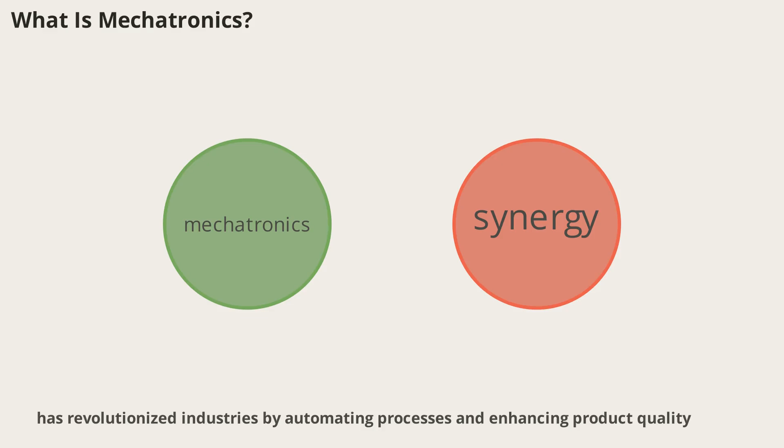Mechatronics is a fascinating field that blends mechanics, electronics, computer technology, and control engineering to create smarter, more efficient systems. Originating in Japan during the late 1960s, the term was first coined by Mr. Tetsuro Mori, a senior engineer at Yaskawa. The essence of mechatronics lies in its synergy, combining multiple disciplines to produce systems that are simpler, more reliable, and cost-effective. This introduction sets the stage for understanding how mechatronics has revolutionized industries by automating processes and enhancing product quality. As we move forward, we'll explore the key advantages and challenges associated with mechatronics.

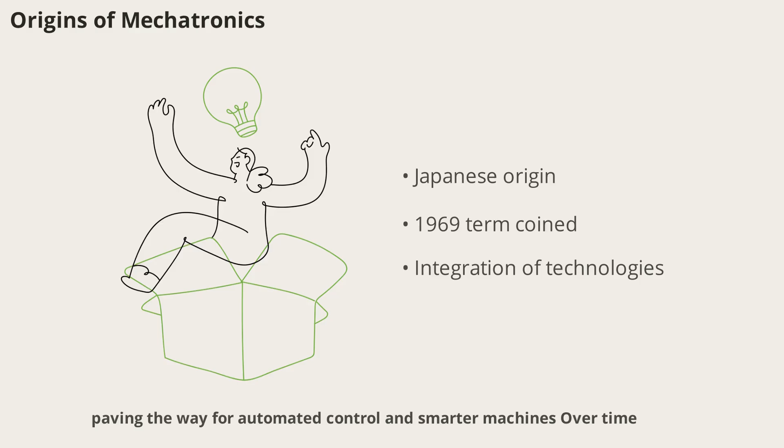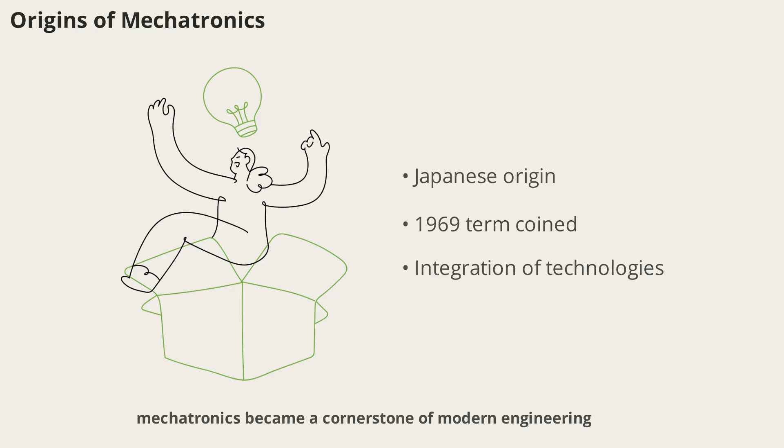The concept of mechatronics emerged in Japan in the late 1960s, with Mr. Tetsuro Mori of Yaskawa introducing the term. Initially, it described the integration of electronics and computer technology into mechanical systems, paving the way for automated control and smarter machines. Over time, mechatronics evolved to encompass a broader range of technologies, including sensors, actuators, and advanced control units. This historical perspective helps us appreciate how mechatronics became a cornerstone of modern engineering, influencing everything from manufacturing to robotics.

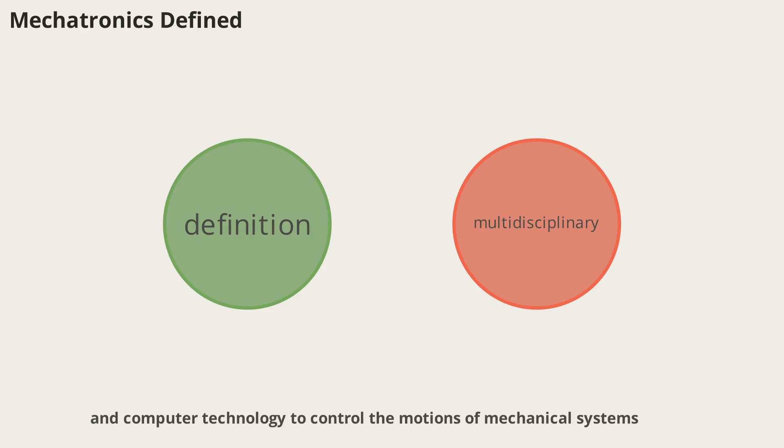Mechatronics can be defined as the application of electronics and computer technology to control the motions of mechanical systems. It represents a synergistic combination of mechanics, electrical engineering, electronics, computer science, and control systems. By merging these fields, mechatronics enables the creation of systems that are not only efficient but also adaptable and reliable. This multidisciplinary approach is what sets mechatronics apart from traditional engineering, allowing for innovative solutions in automation and intelligent design.

Mechatronics offers several compelling advantages. Automated machines can operate continuously, maximizing utilization and productivity. The reduction in human labor and fewer machine parts lead to lower operating and maintenance costs. Compact designs save space, and the use of automatic systems ensures uniform product quality. Flexibility is another key benefit, as mechatronics systems can be easily modified or redesigned. Additionally, smart machines with self-correcting sensory and feedback systems help minimize waste and improve efficiency. These advantages make mechatronics a preferred choice in many industries.

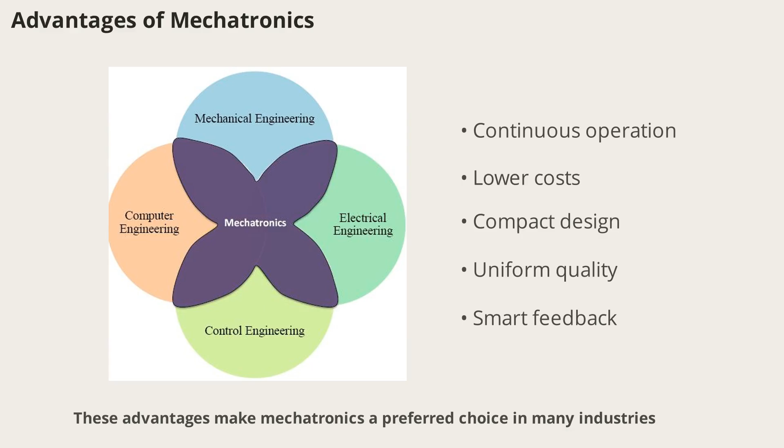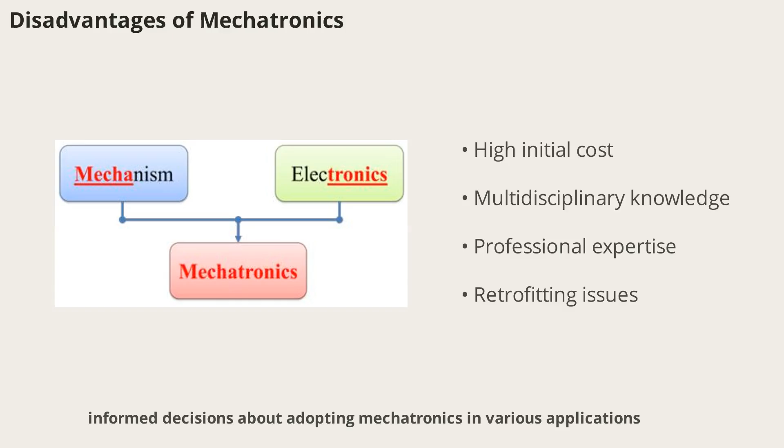Despite its many benefits, mechatronics also presents some challenges. The initial cost of implementing a mechatronic system can be high, requiring significant investment. Designers and engineers must possess knowledge across multiple fields, making the process complex. Specific problems often require highly qualified professionals to address them. Furthermore, retrofitting existing systems with mechatronics technology can be expensive and difficult. Understanding these disadvantages is crucial for making informed decisions about adopting mechatronics in various applications.

Traditional systems rely heavily on mechanical components such as levers, gears, and cams to perform tasks. In contrast, mechatronic systems integrate electronics with mechanical parts, resulting in greater flexibility and accuracy. Traditional mechanisms are often more complicated and involve more moving parts, while mechatronics simplifies design and reduces the number of components. Automation replaces manual control, making mechatronic systems more efficient and reliable. This comparison highlights the transformative impact of mechatronics on engineering and everyday devices.

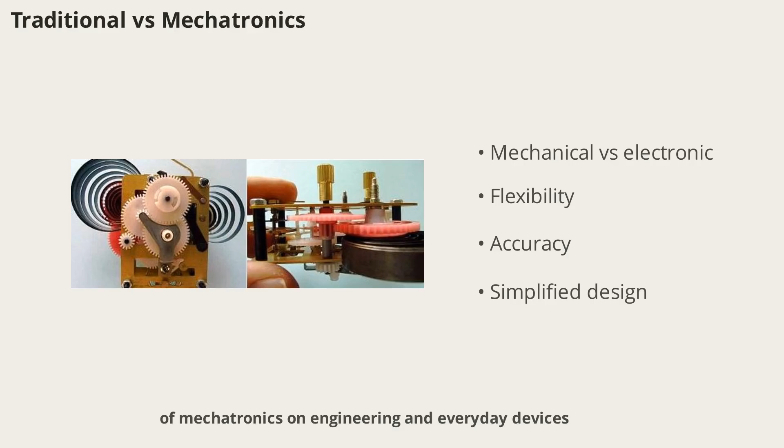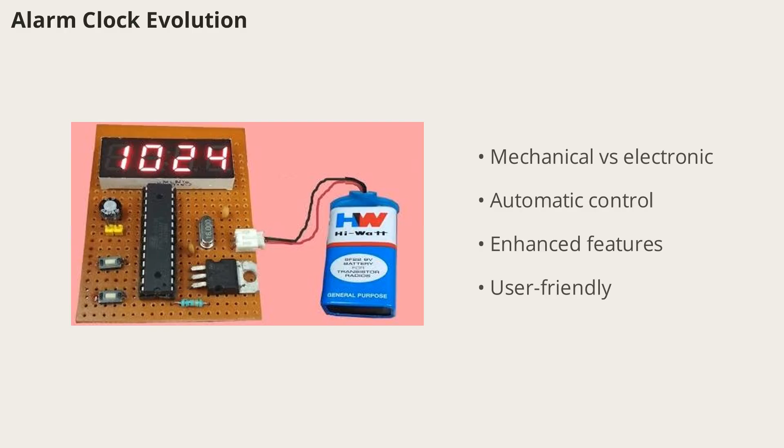A clear example of the shift from traditional to mechatronic systems is seen in alarm clocks. Traditional mechanical alarm clocks use gears and springs, requiring manual setup and adjustment. Mechatronic alarm clocks, on the other hand, combine electronics and computer technology, enabling automatic control and enhanced features. This evolution demonstrates how mechatronics improves everyday objects, making them more user-friendly, accurate, and reliable. The integration of sensors and microcontrollers allows for smarter operation and customization.

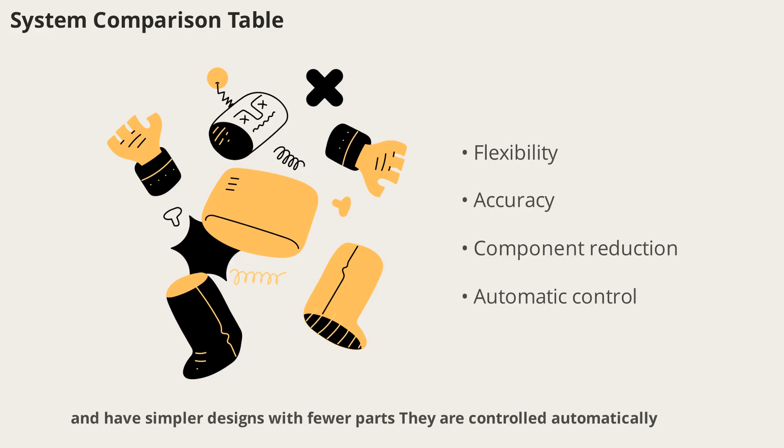Comparing traditional and mechatronic systems, several differences stand out. Traditional systems are less flexible, less accurate, and involve more complicated mechanisms with numerous moving parts. They are controlled manually and require more components. Mechatronic systems, in contrast, are more flexible, accurate, and have simpler designs with fewer parts. They are controlled automatically, making them easier to maintain and operate. This comparison underscores the advantages of adopting mechatronics in modern engineering.

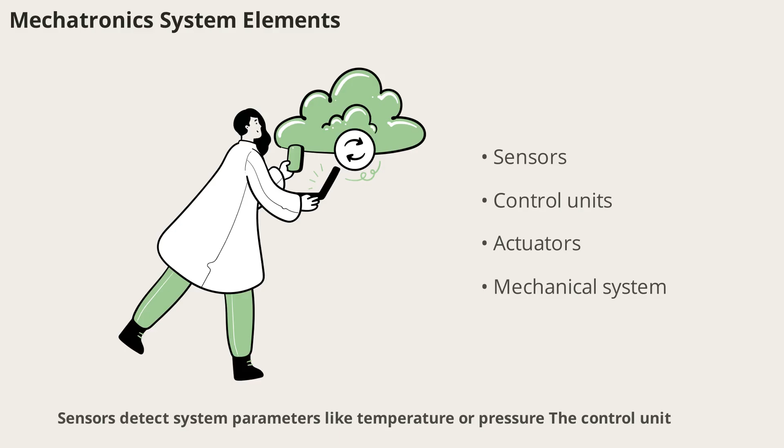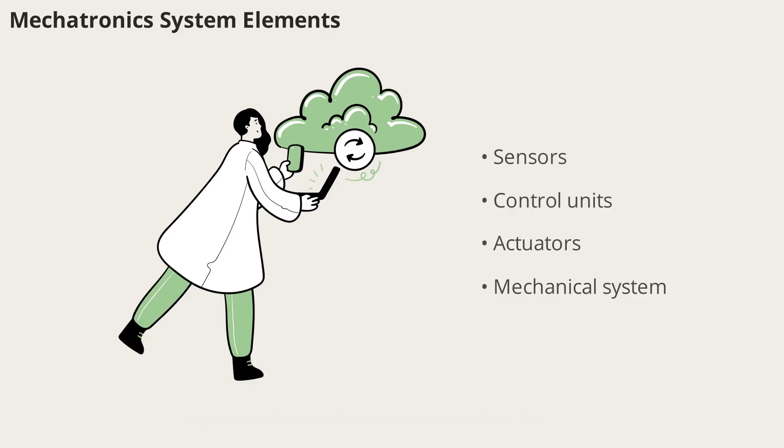A mechatronic system is composed of four main elements: sensors, control units, actuators, and mechanical components. Sensors detect system parameters like temperature or pressure. The control unit, often a microcontroller or computer, processes sensor input and makes decisions based on programmed instructions. Actuators produce motion or actions such as motors or valves. The mechanical system ties everything together, forming a complete unit like a robot or washing machine. Understanding these elements is key to grasping how mechatronic systems function.

Sensors are vital components in mechatronic systems, responsible for detecting physical parameters such as temperature, pressure, displacement, and force. Examples include thermocouples, accelerometers, and gravity sensors. These devices convert physical inputs into electrical signals, which are then processed by the control unit.

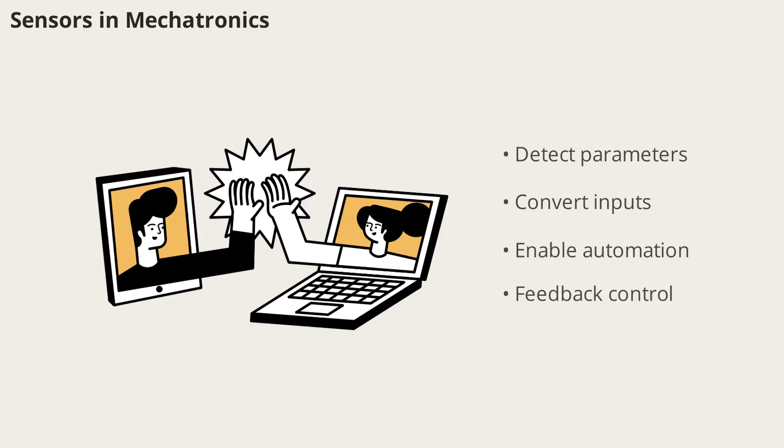Sensors enable systems to monitor their environment and respond intelligently, forming the foundation for automation and feedback control. Their role is essential in ensuring accuracy and reliability in mechatronic applications.

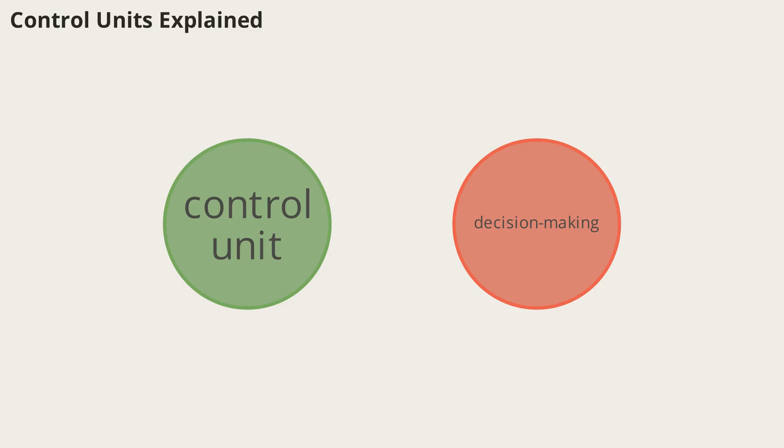The control unit in a mechatronic system acts as the brain, making decisions based on sensor input and programmed instructions. It can be a microcontroller, computer, electronic circuit, or PLC. By processing data from sensors, the control unit determines the appropriate actions for actuators. This decision-making capability allows for precise control and automation, adapting to changing conditions and ensuring optimal performance. The control unit is central to the intelligence of mechatronic systems.

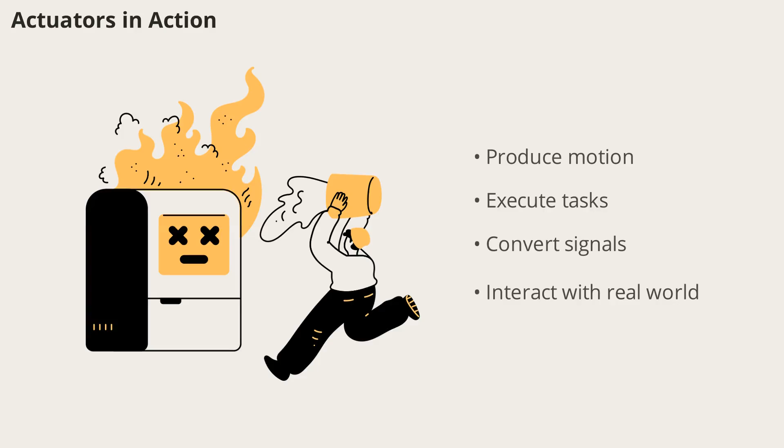Actuators are the components that produce motion or cause actions in a mechatronic system. Examples include solenoids, DC motors, stepper motors, servo motors, hydraulic and pneumatic cylinders, and heaters. Actuators receive signals from the control unit and execute tasks such as moving parts, opening valves, or heating elements. Their ability to convert electrical signals into physical actions is what enables mechatronic systems to interact with the real world

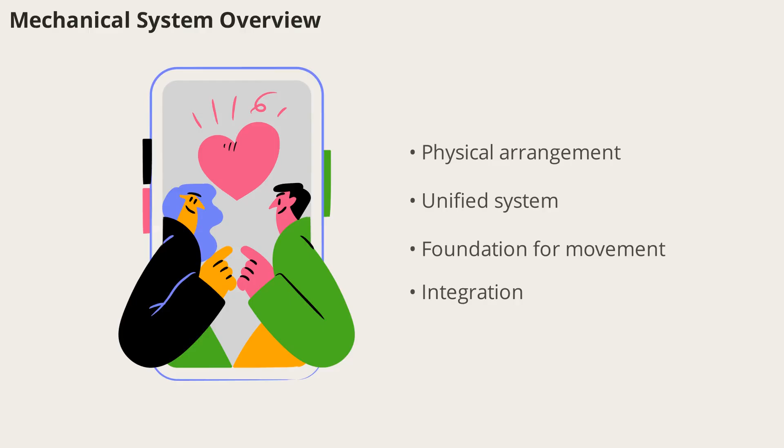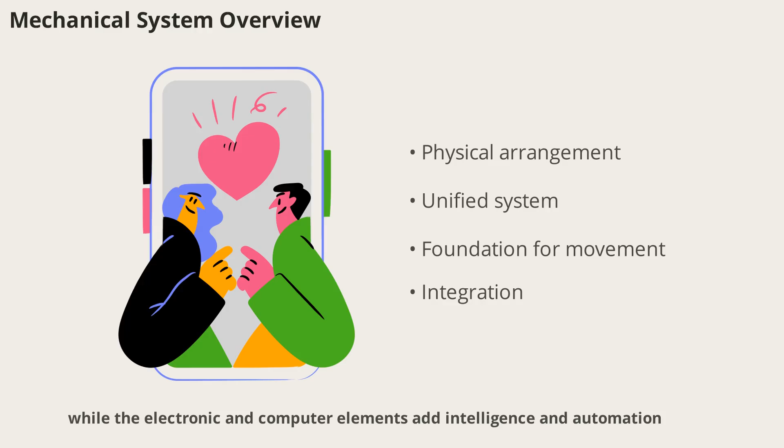and perform complex operations. The mechanical system is the physical arrangement of components that forms the core of a mechatronic device. Examples include robots, autonomous guided vehicles, vehicle engines, and washing machines. These systems are designed to work as a unified whole, with sensors, control units, and actuators integrated seamlessly. The mechanical structure provides the foundation for movement and operation, while the electronic and computer elements add intelligence and automation.

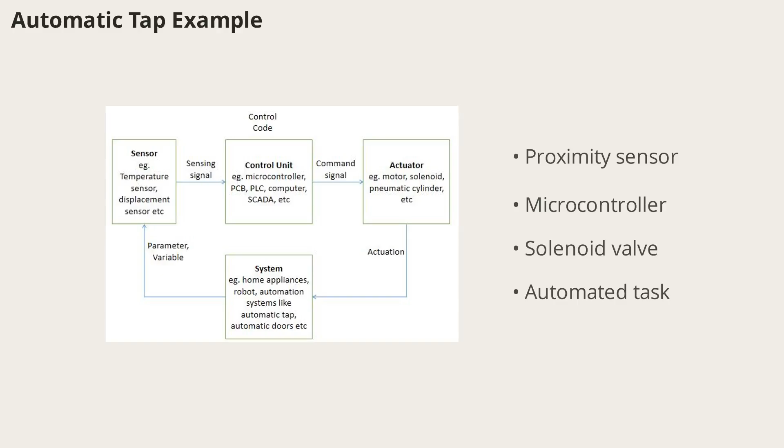A practical example of a mechatronic system is the automatic tap. Here, a proximity sensor detects the presence of a hand and sends a signal to the control unit, typically a microcontroller. The microcontroller processes the input and decides whether to activate the tap. A solenoid valve acts as the actuator, controlling the flow of water. This system demonstrates how sensors, control units, and actuators work together to automate everyday tasks, improving convenience and hygiene.

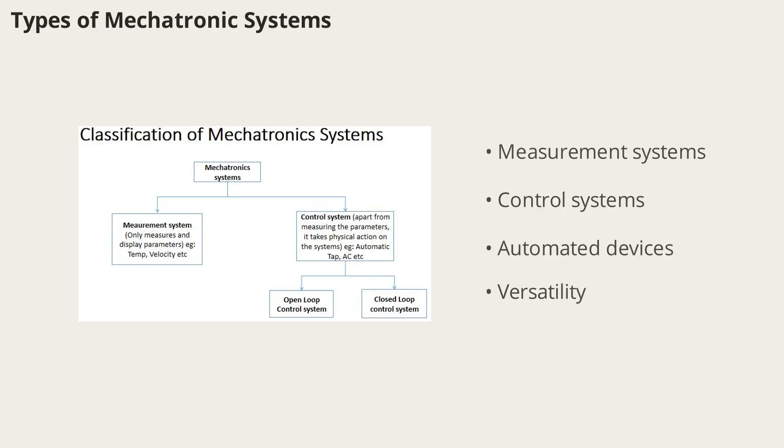Mechatronic systems come in various forms, each tailored to specific applications. Examples include measurement systems, control systems, and automated devices. Measurement systems use sensors to monitor physical parameters, while control systems manage variables and sequences of events. Automated devices combine these elements to perform tasks with minimal human intervention. Understanding the different types of mechatronic systems helps us appreciate their versatility and impact across industries.

Measurement systems in mechatronics use sensors to convert physical inputs, such as temperature or displacement, into electrical outputs like voltage. The data processing unit receives this input and processes it according to programmed instructions, often performing signal conditioning. The data presentation unit or recorder then displays or records the measured parameter in the desired format. An example is the digital thermometer, which we'll explore in detail later.

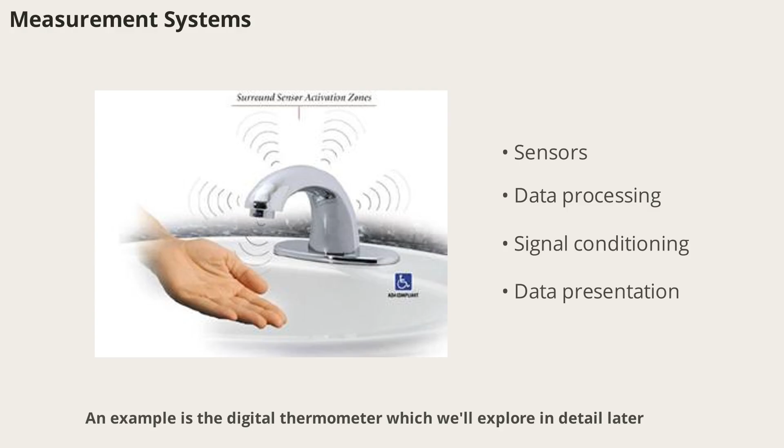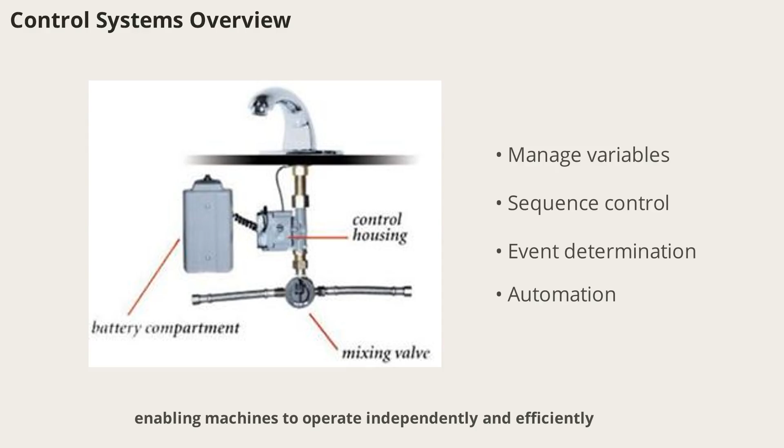Control systems are designed to manage variables, sequences of events, or determine whether an event occurs. Examples include steering control in automobiles, room air conditioning, automatic sensing doors, and washing machines. These systems use sensors and control units to monitor conditions and make decisions, ensuring optimal performance and safety. Control systems are fundamental to automation, enabling machines to operate independently and efficiently.

Open-loop control systems operate without feedback, meaning the control action is based solely on the reference input. The controller does not check the output condition, so errors cannot be self-corrected. These systems are simple in construction, economical, and easy to maintain, but they are less accurate and reliable. Any changes in system components must be addressed manually.

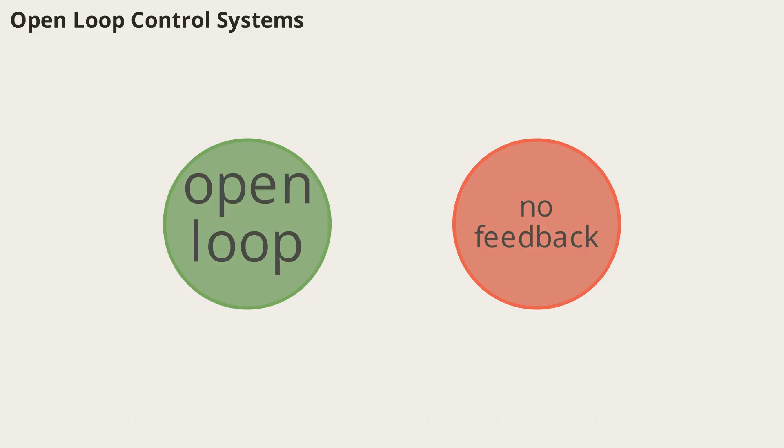An example is the manual cloth dryer, where the operator sets the timer without checking if the clothes are dry. Consider a cloth dryer as an open-loop system: the operator manually sets the timer based on the wetness of the clothes. After the set time, the dryer stops regardless of whether the clothes are actually dry. There is no feedback mechanism to check the dryness, making the system dependent on human judgment. This example illustrates the limitations of open-loop systems, highlighting the need for more accurate and automated solutions.

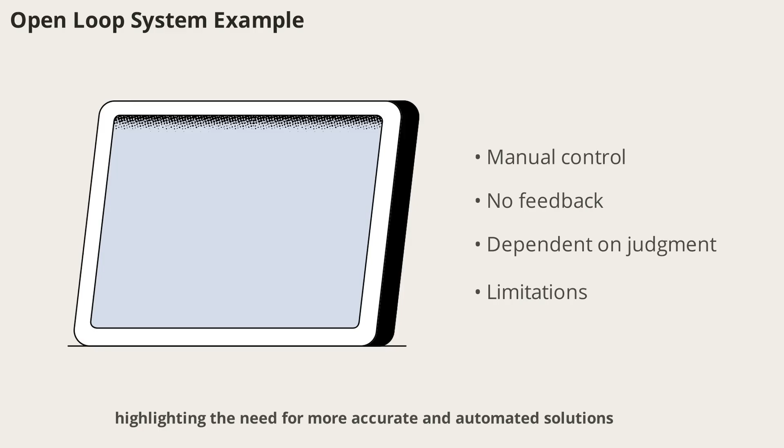Closed-loop control systems use feedback to monitor output and adjust control actions accordingly. The controller considers both the reference input and feedback from sensors, enabling automatic correction of errors. These systems are highly accurate and can be automated, but they are more expensive and complex to design and maintain. Closed-loop systems are essential for applications requiring precision and reliability, such as automated cloth dryers that sense dryness and adjust

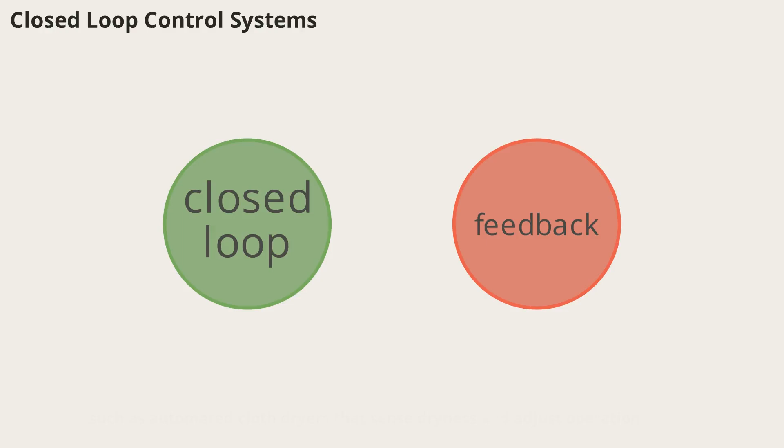operation. In a closed-loop cloth dryer, the user specifies the desired dryness level. A sensor measures the dryness of the clothes and provides feedback to the controller. The controller compares the sensor output with the required dryness and adjusts the operation accordingly.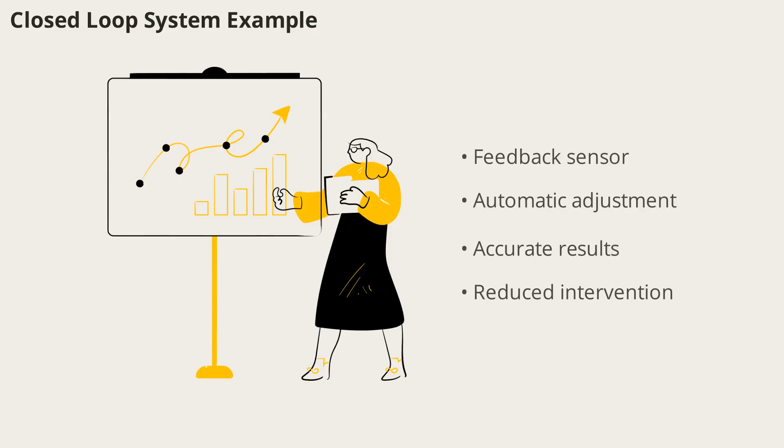This feedback mechanism ensures accurate results and reduces the need for manual intervention. Closed-loop systems demonstrate the power of automation and intelligent control in mechatronics.

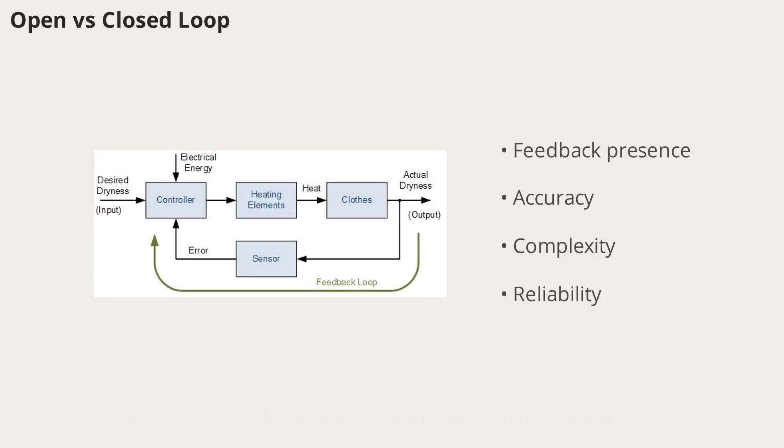Comparing open and closed-loop systems reveals key differences. Open-loop systems lack feedback, are less accurate, and rely on human judgment. They are easier to design and build but cannot automatically correct errors. Closed-loop systems include feedback elements, are more accurate, and adjust control actions based on output and sensor input. They are more complex but offer greater reliability and automation. This comparison highlights the importance of feedback in modern mechatronic systems.

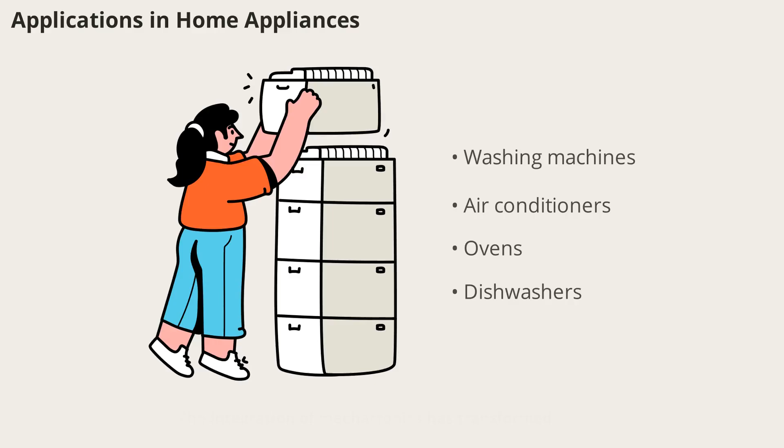Mechatronics is widely used in home appliances such as washing machines, air conditioners, ovens, and dishwashers. These devices incorporate sensors, control units, and actuators to automate processes, improve efficiency, and ensure consistent quality. Automation in home appliances reduces manual effort and enhances user convenience, making everyday tasks simpler and more reliable. The integration of mechatronics has transformed the way we interact with household devices.

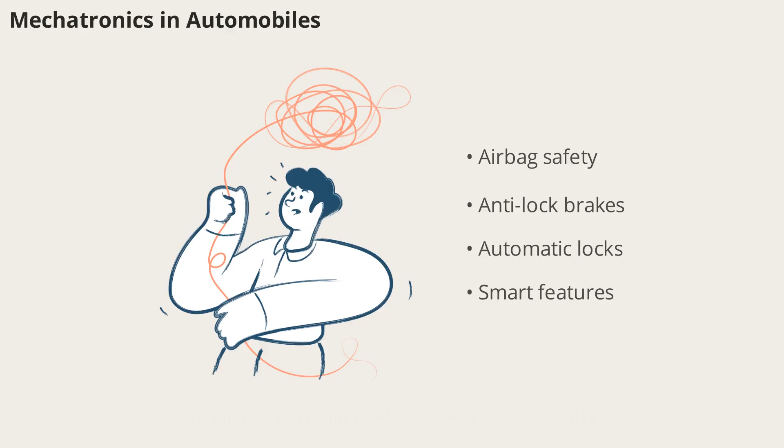Automobiles benefit greatly from mechatronics, with systems like airbag safety, anti-lock brakes, and automatic door locks. Sensors and control units monitor conditions and respond instantly to ensure safety and performance. Mechatronics enables advanced features such as adaptive cruise control and automated parking, making vehicles smarter and safer. The integration of electronics and mechanics in automobiles showcases the versatility and impact of mechatronics technology.

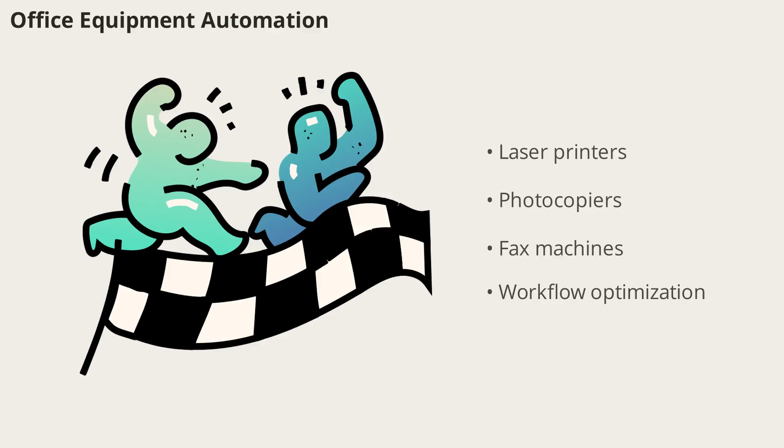Mechatronics is also prevalent in office equipment such as laser printers, photocopying machines, and fax machines. These devices use sensors and control units to automate tasks, improve speed, and enhance reliability. Automation in office equipment streamlines workflow, reduces errors, and increases productivity. The adoption of mechatronics in office environments demonstrates its ability to optimize routine operations and support modern business needs.

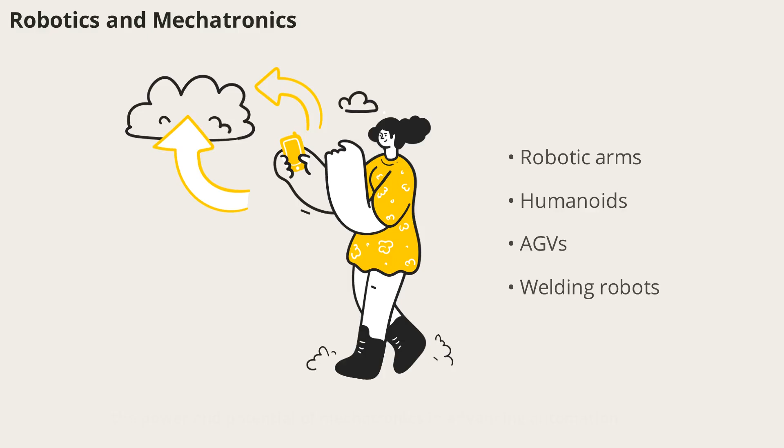Robotics is a prime example of mechatronics in action. Robotic arms, humanoids, automated guided vehicles, and welding robots all rely on sensors, control units, and actuators to perform complex tasks. Mechatronics enables robots to operate autonomously, adapt to changing environments, and execute precise movements. The integration of multiple technologies in robotics demonstrates the power and potential of mechatronics in advancing automation.

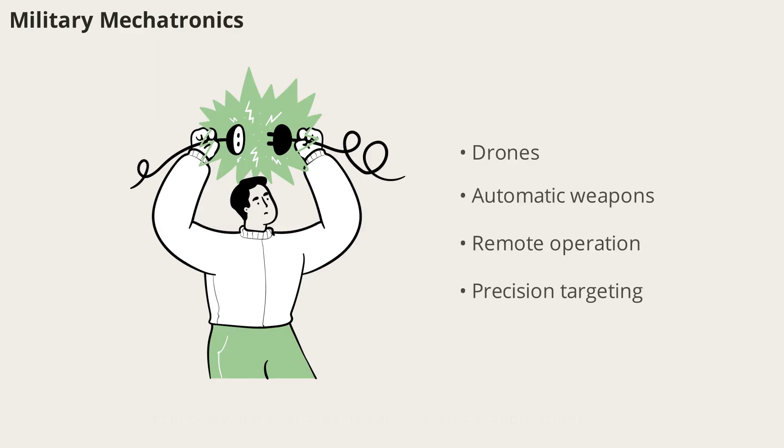Mechatronics plays a crucial role in military operations, powering drones and automatic weapon systems. Sensors and control units enable real-time monitoring and response, enhancing safety and effectiveness. Automation in military devices allows for remote operation and precision targeting, reducing risks and improving mission outcomes. The integration of mechatronics in defense technology demonstrates its value in critical applications.

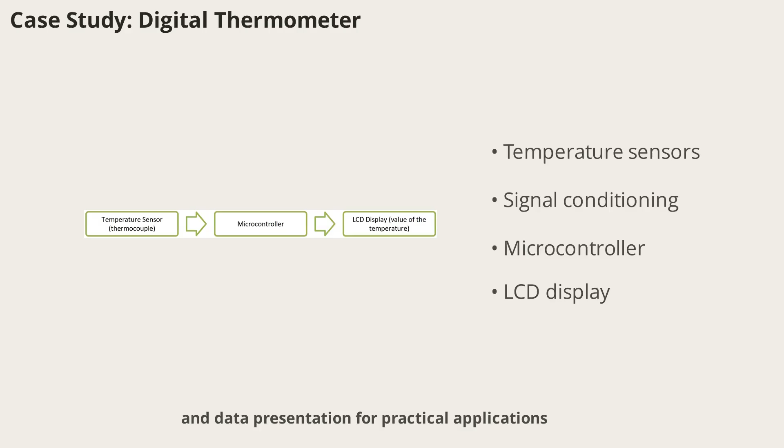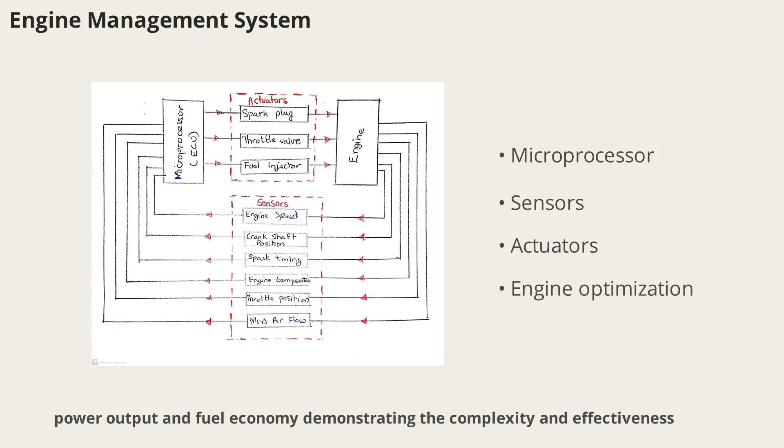In an engine management system, a microprocessor receives input from various sensors and operates actuators to optimize engine performance. Sensors monitor engine speed, crankshaft position, spark timing, temperature, throttle position, and airflow. The microprocessor processes this data and controls actuators like spark plugs, throttle valves, and fuel injectors. This system ensures efficient combustion, power output, and fuel economy, demonstrating the complexity and effectiveness of mechatronics in automotive engineering.

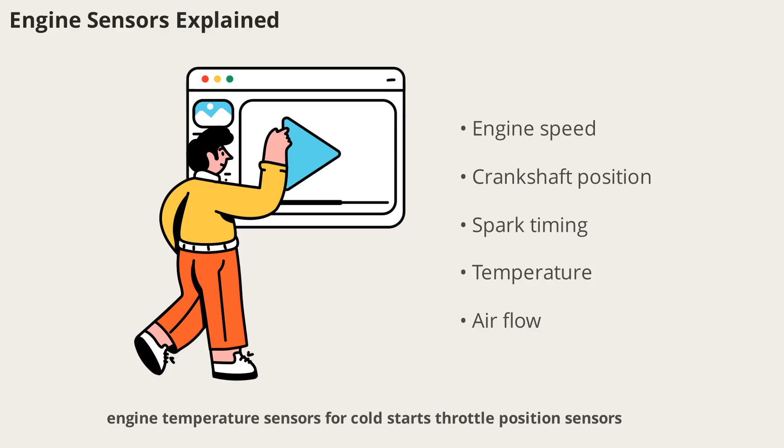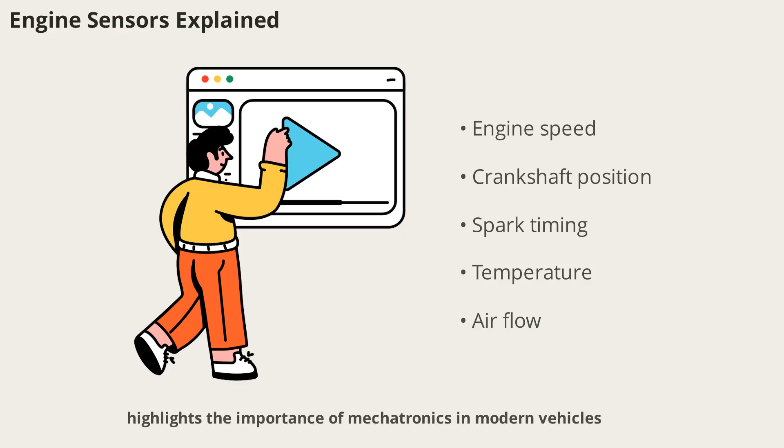Engine management systems rely on several sensors: engine speed sensors for spark timing, crankshaft position sensors for piston location, spark timing sensors, engine temperature sensors for cold starts, throttle position sensors, and mass airflow sensors. These sensors provide critical data to the microprocessor, enabling precise control of combustion and engine operation. The integration of sensors in automotive systems highlights the importance of mechatronics in modern vehicles.

Actuators in engine management systems include spark plugs, throttle valves, and fuel injectors. Spark plugs initiate combustion, throttle valves regulate air intake, and fuel injectors control fuel delivery.

The microprocessor uses sensor data to operate these actuators, optimizing engine performance and efficiency. This coordinated control demonstrates the power of mechatronics in achieving precise and reliable operation in automotive systems.

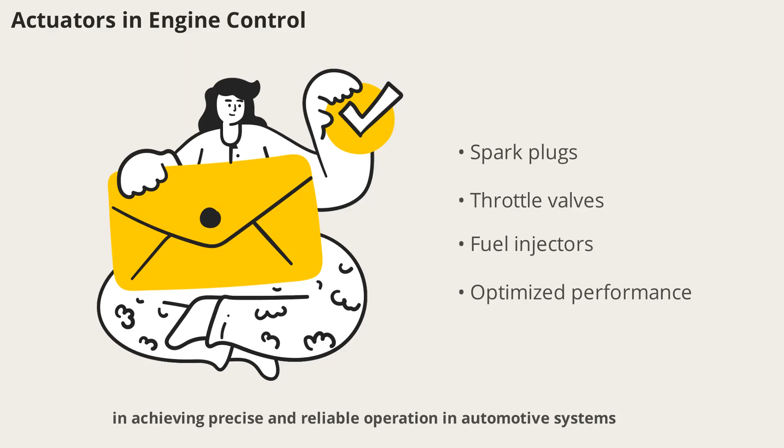Automatic washing machines are a common example of mechatronic control systems. The microprocessor checks if the door is closed using a sensor, then operates a valve to fill the drum with water. Water level sensors provide feedback, allowing the microprocessor to switch off the valve when the desired level is reached.

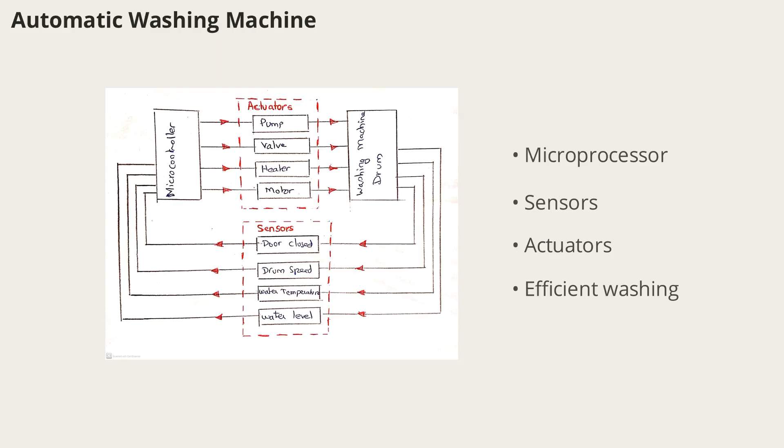The main wash cycle involves heating water, rotating the drum, and emptying water, all controlled by sensors and actuators. This automation ensures efficient and thorough washing.

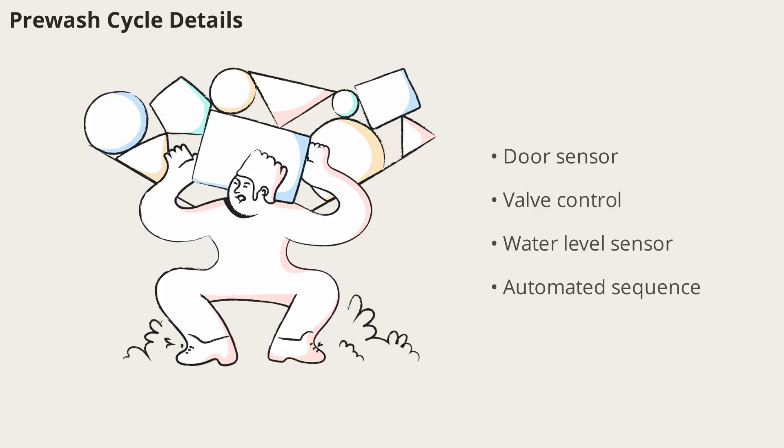During the pre-wash cycle, the microprocessor ensures the door is closed before starting. It operates a valve to allow water into the drum, with a water level sensor providing feedback. Once the desired water level is reached, the valve is switched off. This sequence demonstrates the use of sensors and actuators to automate and optimize washing machine operation, reducing manual effort and improving performance.

In the main wash cycle, the microprocessor operates a switch to turn on the heater, heating the water. A temperature sensor monitors the water, allowing the microprocessor to switch off the heater when the required temperature is reached.

The drum motor is then activated to rotate the drum for a preset time, with a speed sensor providing feedback. The discharge pump is operated to empty the water, ensuring thorough washing and rinsing.

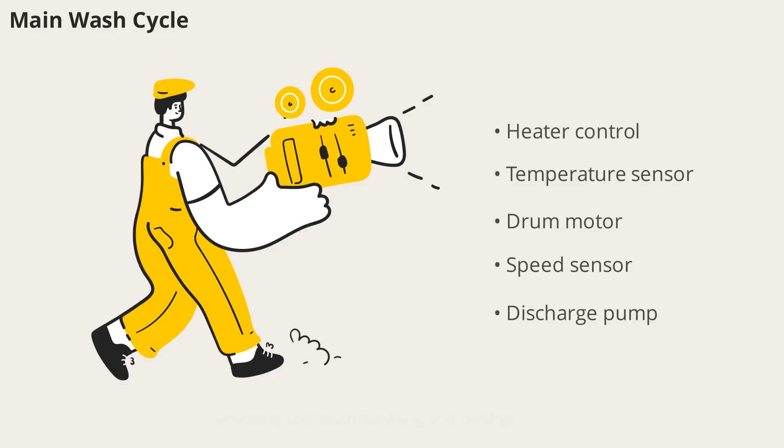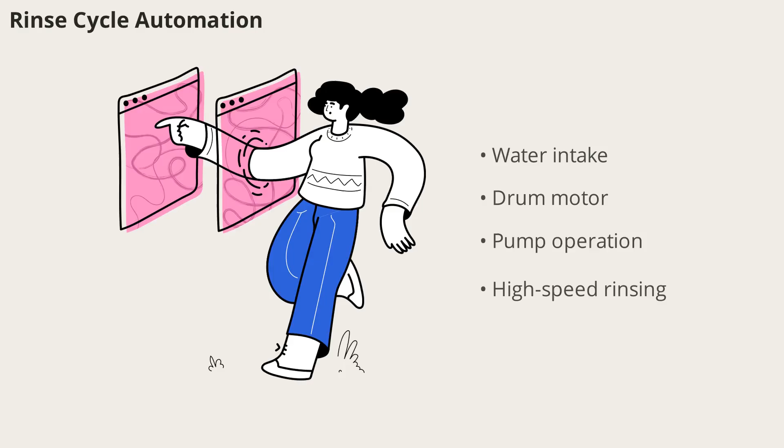The rinse cycle involves a sequence of activities: allowing water in, operating the drum motor, and activating the pump to empty water. This cycle is repeated several times, with the drum motor switched to high speed for final rinsing. Automation in the rinse cycle ensures consistent and efficient cleaning, demonstrating the benefits of mechatronics in household appliances.

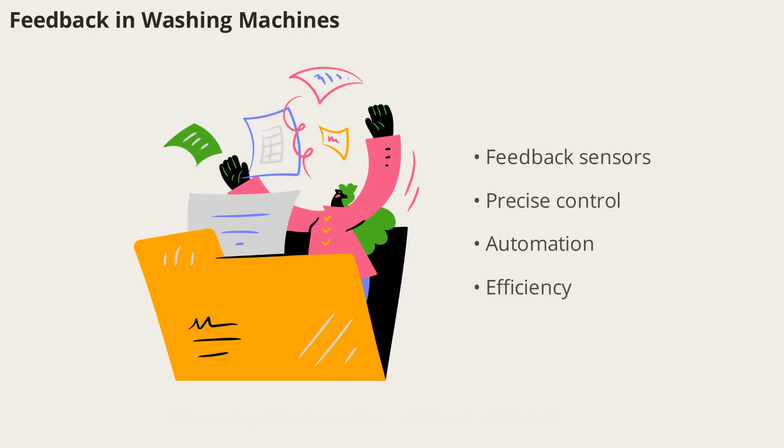Feedback mechanisms in washing machines, such as water level and speed sensors, enable precise control and automation. The microprocessor uses sensor data to adjust operations, ensuring optimal washing and rinsing. This feedback-driven approach reduces errors, improves efficiency, and enhances user convenience. Mechatronics transforms washing machines into intelligent devices capable of adapting to different conditions.

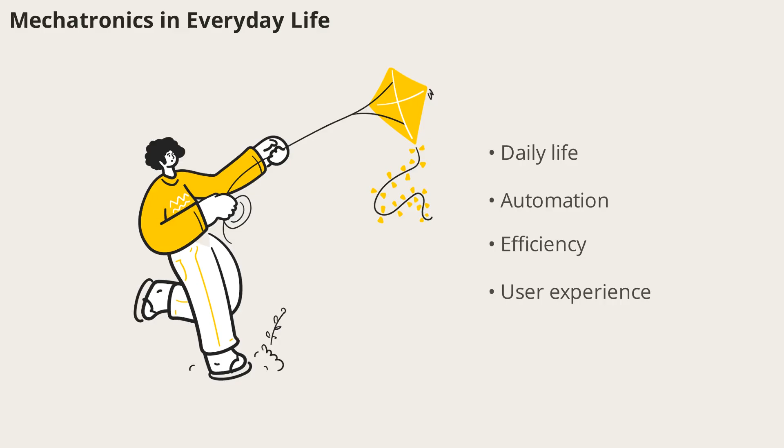Mechatronics is present in many aspects of daily life, from home appliances and automobiles to office equipment and entertainment devices. Its integration of sensors, control units, and actuators enables automation, improves efficiency, and enhances user experience. The widespread adoption of mechatronics demonstrates its value in simplifying tasks, increasing reliability, and supporting innovation across industries.

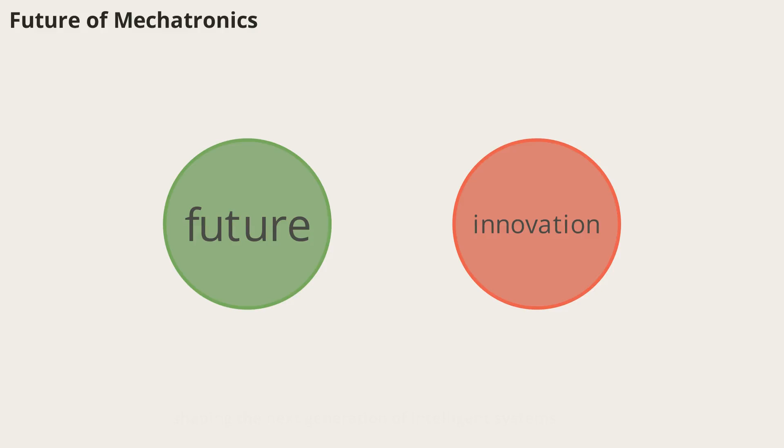The future of mechatronics is bright, with advancements in sensors, control units, and actuators driving innovation. Emerging technologies such as artificial intelligence and the Internet of Things are expanding the capabilities of mechatronic systems. Automation will continue to transform industries, making devices smarter, more efficient, and adaptable. Mechatronics will play a key role in shaping the next generation of intelligent systems.

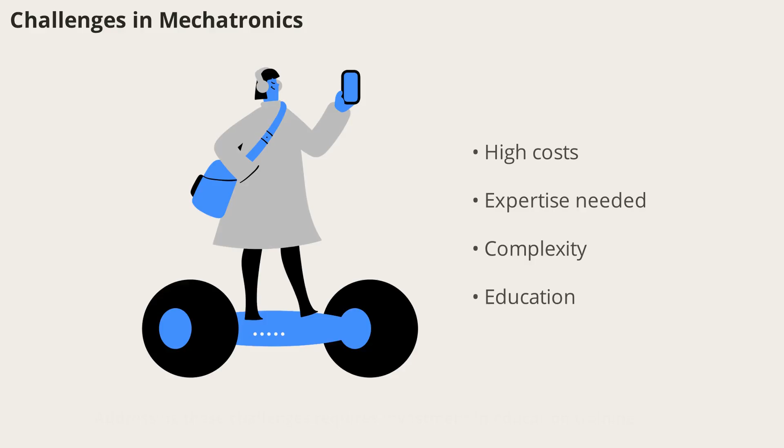While mechatronics offers many benefits, it also presents challenges such as high initial costs, multidisciplinary expertise requirements, and complexity in design and maintenance. Addressing these challenges requires investment in education, training, and research. As mechatronics continues to evolve, overcoming these obstacles will be essential for maximizing its potential and ensuring successful implementation in various fields.

Education in mechatronics is crucial for developing skilled professionals capable of designing, implementing, and maintaining advanced systems. Training programs and interdisciplinary courses provide knowledge in mechanics, electronics, computer science, and control engineering. Investing in education ensures a workforce ready to tackle the challenges and opportunities presented by mechatronics, supporting innovation and growth in the industry.

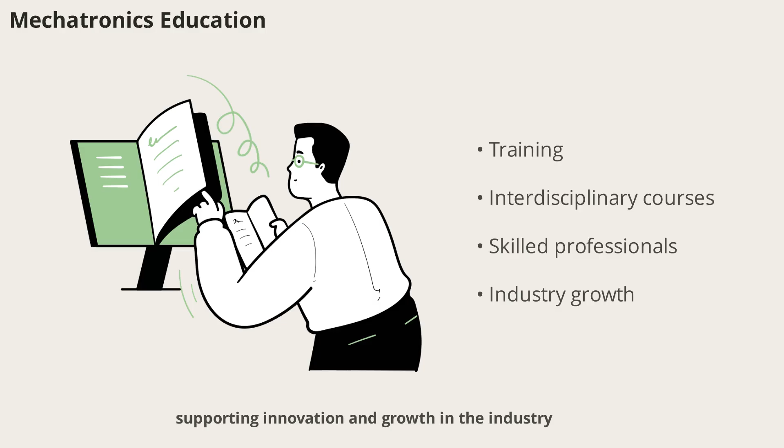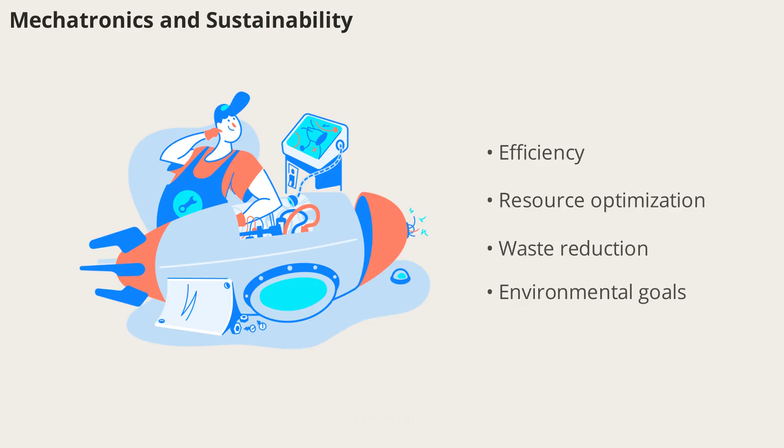Mechatronics contributes to sustainability by enabling efficient use of resources, reducing waste, and optimizing processes. Automated systems minimize energy consumption and improve product quality, supporting environmental goals. The integration of mechatronics in manufacturing, transportation, and other sectors promotes sustainable practices and helps address global challenges such as climate change and resource scarcity.

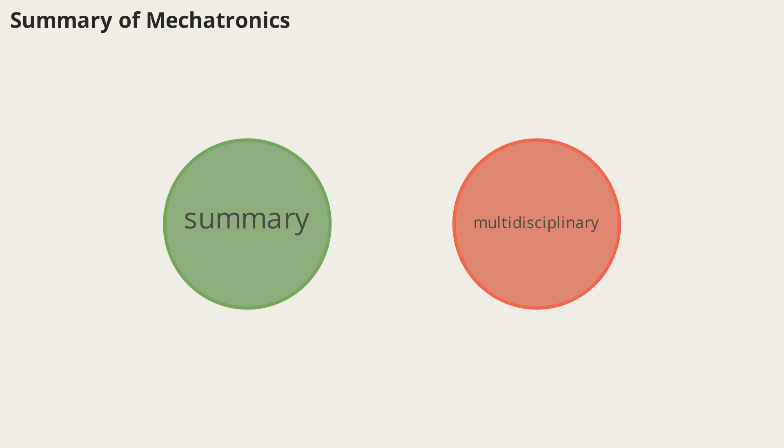Mechatronics is a multidisciplinary field that combines mechanics, electronics, computer technology, and control engineering to create intelligent and automated systems. Its applications span home appliances, automobiles, office equipment, entertainment, robotics, medical devices, and military technology. The advantages of mechatronics include automation, efficiency, flexibility, and reliability, while challenges involve cost and complexity. Understanding mechatronics is essential for embracing the future of engineering and innovation.

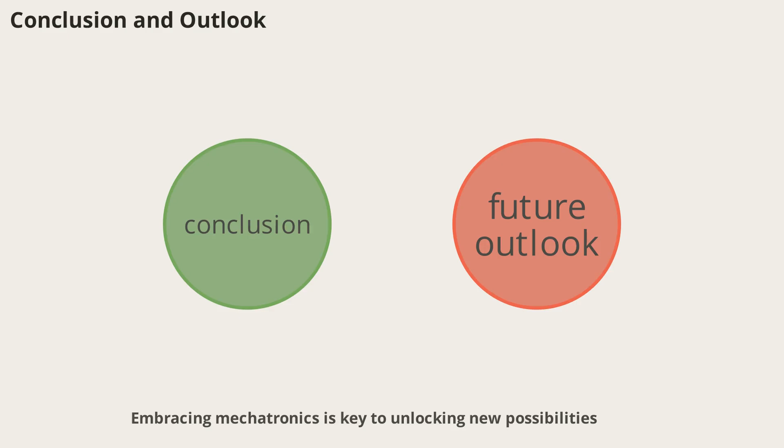Conclusion: mechatronics has transformed the way we design, build, and operate systems across industries. Its integration of mechanics, electronics, and computer technology enables smarter, more efficient, and reliable solutions. As technology advances, mechatronics will continue to drive innovation, shaping the future of automation and intelligent systems. Embracing mechatronics is key to unlocking new possibilities and achieving greater success in engineering and beyond.